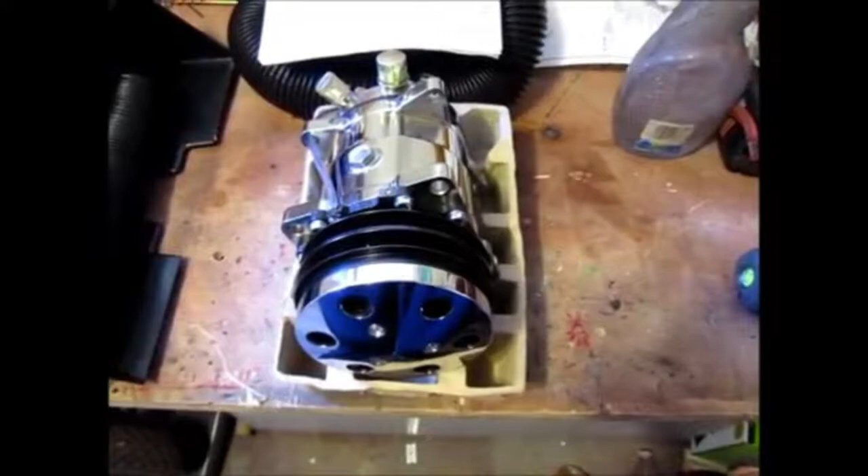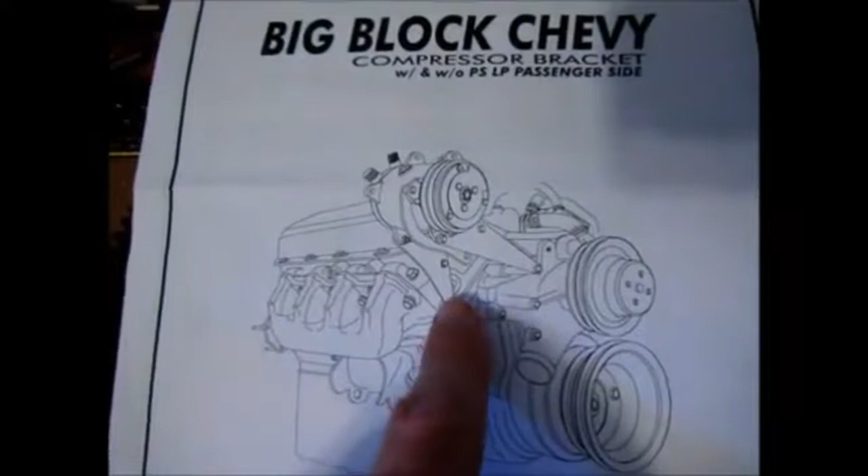The next thing I had to work on was getting this compressor motor on the passenger side. And as with everything else on this project, it wasn't just a wham bam easy installation—things had to be modified. So the first thing I did was get a bracket that would put it on the passenger side.

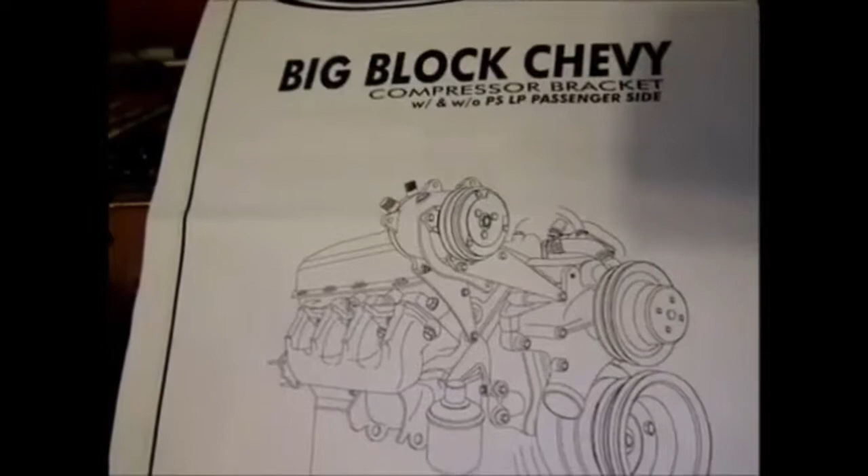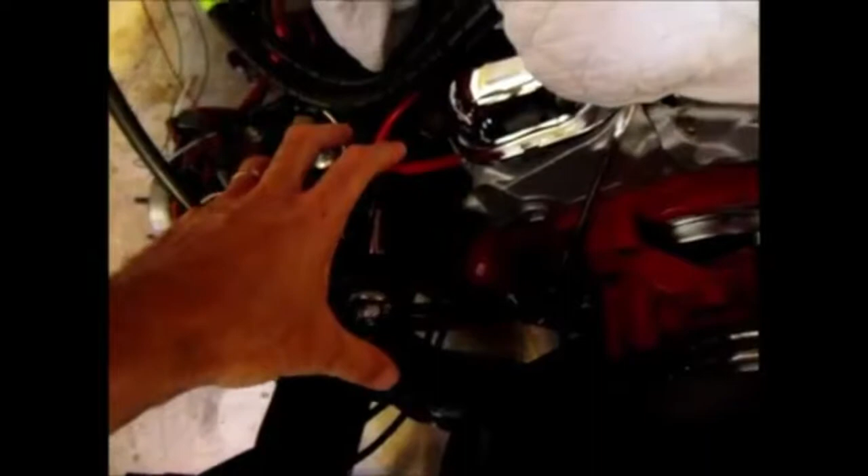There were two choices: one offered from Vintage Air, or the Alan Grove unit, but basically they're both the same. They put the compressor off to the side, and when it gets pushed over, the compressor gets pushed all the way to this side. Now you know why the battery was in the way—because the compressor bracketry would bring it all the way over there. That's why the battery had to go into the trunk.

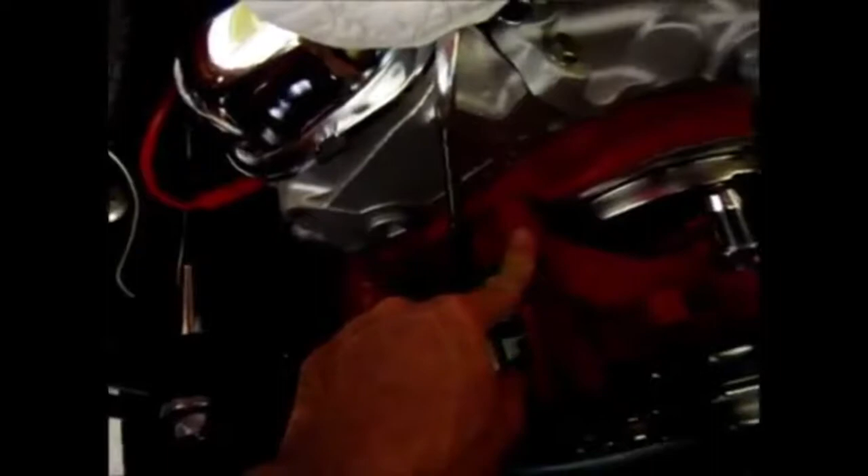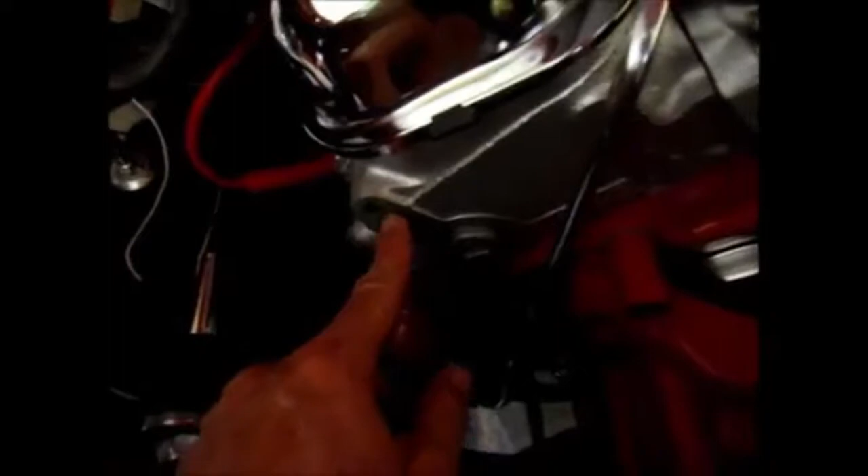Now, because I had the alternator on the bottom, that created a bit of a challenge, because the bracketry uses the two bolts on the head as well as the water pump bolt, and the alternator bracketry also uses a bolt on the head, but it uses this bolt. So I had to figure out a way to get both the alternator bracket and the new compressor motor bracket to join, so I wouldn't have a problem installing both units on this side.

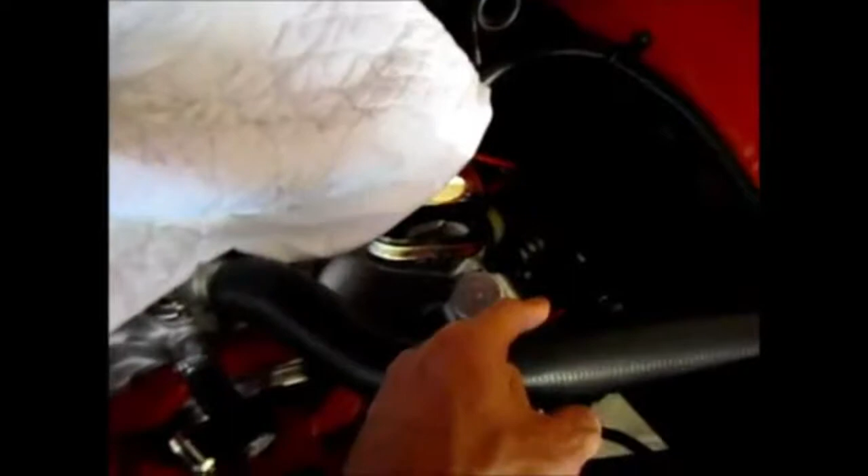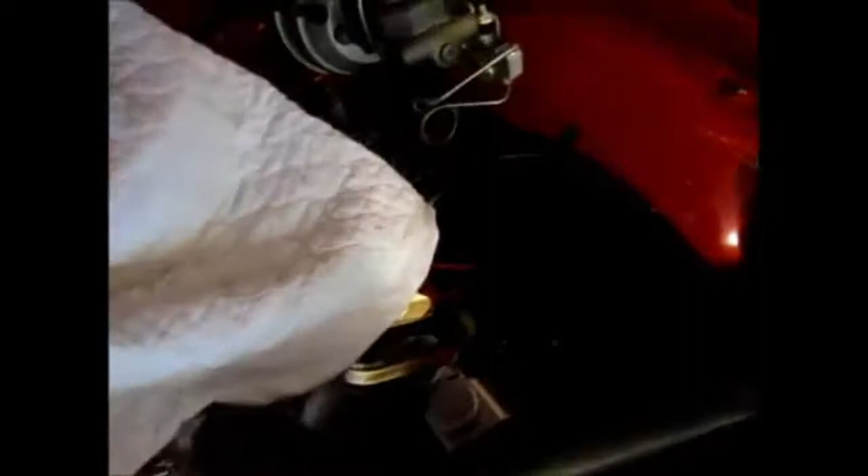Normally, if you want the compressor on this side, you have to put the alternator on the other side with a similar bracket that looks exactly like the one for the compressor, but it's for the alternator instead. As I stated earlier, I have too much stuff on this side and didn't want the alternator there—I wanted it here, under the compressor. So I had to do some work to get that done.

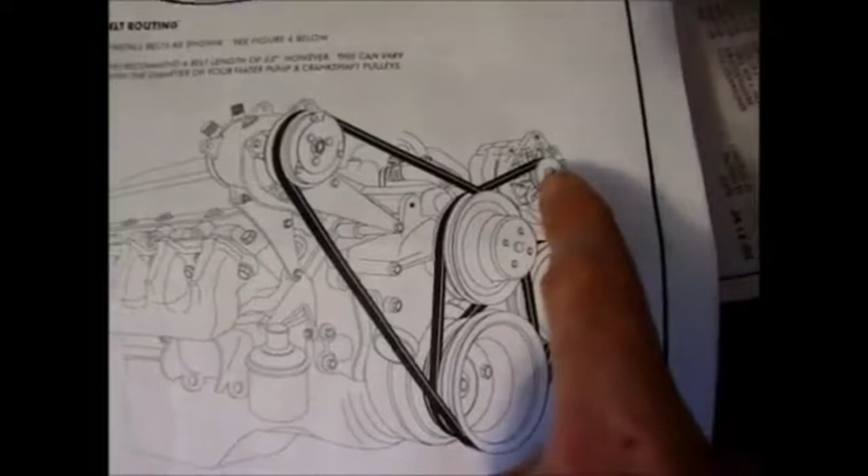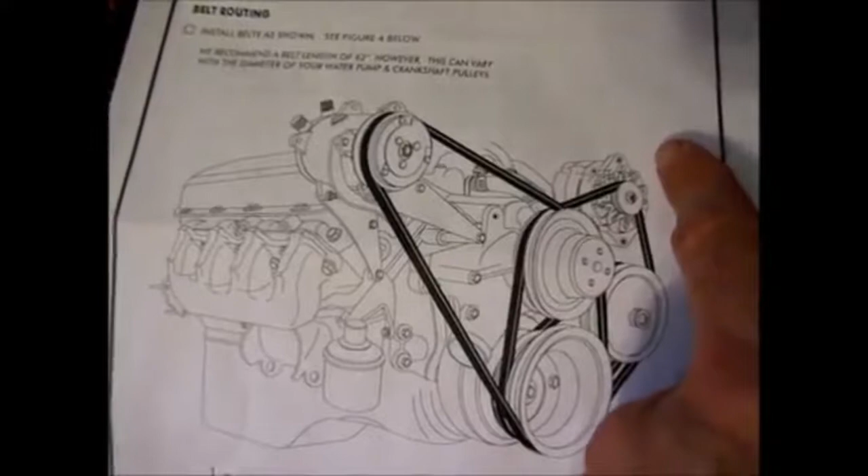Here's basically what the setup is supposed to look like: the compressor on this side and the alternator on the other side. There are two ways to mount the alternator on this side. You could use something similar to stock, which mounts it close to the block, or get the Steeleze bracketry from Vintage Air or the Alan Grove bracketry, which is the same—it would be exactly like the compressor bracket, but put the alternator up here so it'll be in line with each other.

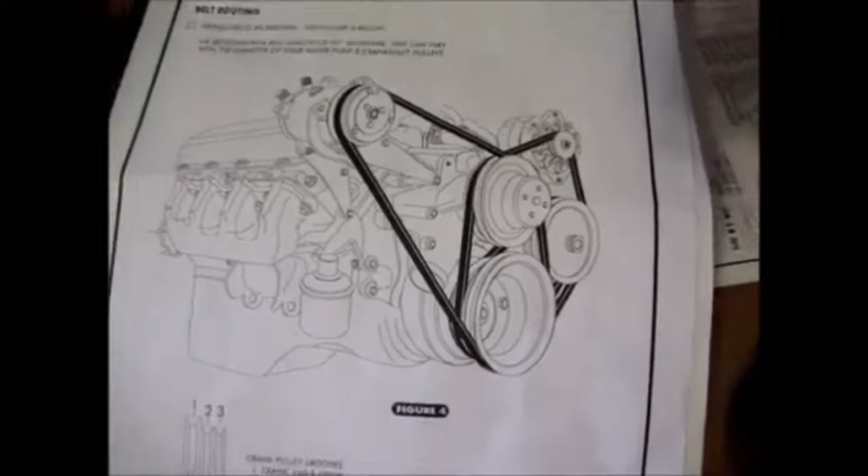Now why is this important? Why am I showing you this? The reason is the way the belts route. When you have the compressor on this side, the belt is supposed to route to the crankshaft and the water pump, then over to the compressor again. The way I had it before, since the alternator was down here, it was routed similarly to how it is now, but it would go around the crankshaft, the water pump, and back to the alternator.

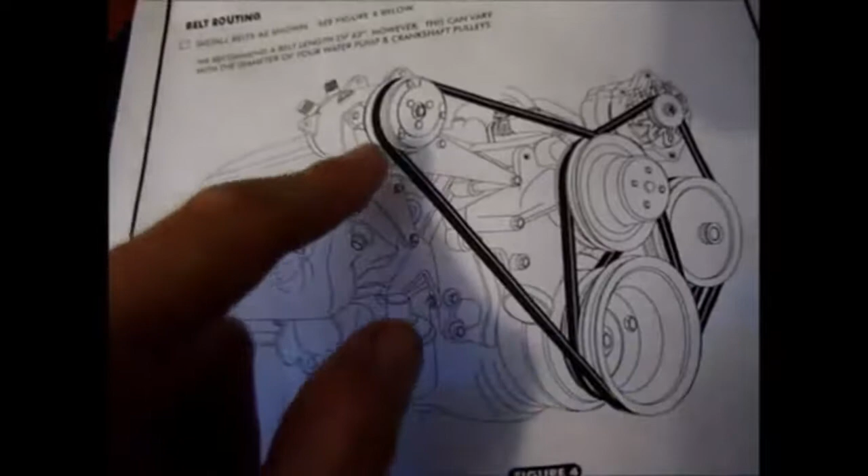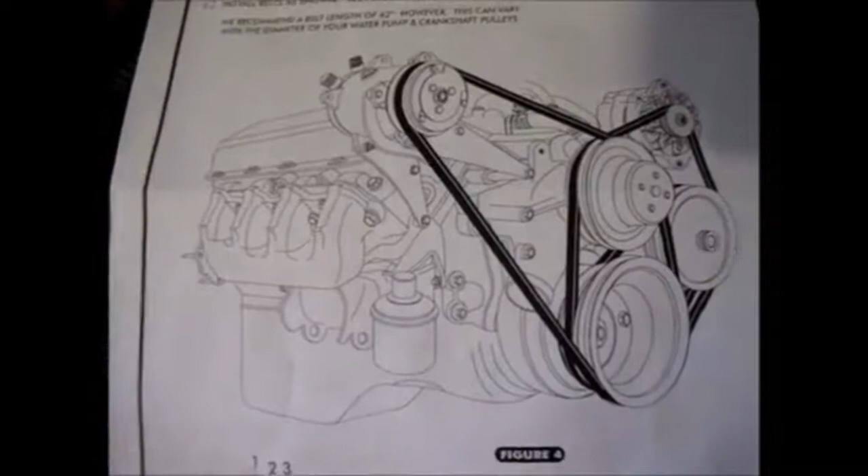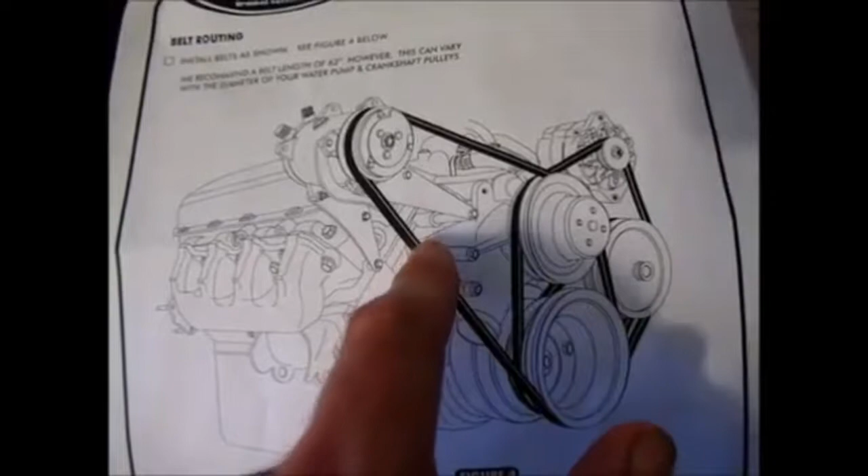When you install this bracketry onto this side of the engine, this belt goes in line with the alternator, and that creates a problem, because there's no way you can route the belt all the way around the compressor, water pump, and crankshaft and at the same time put tension on the alternator. It just won't happen.

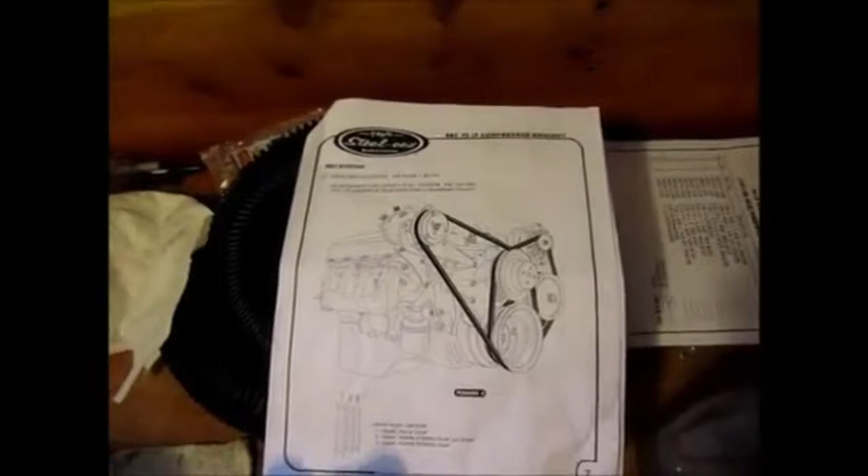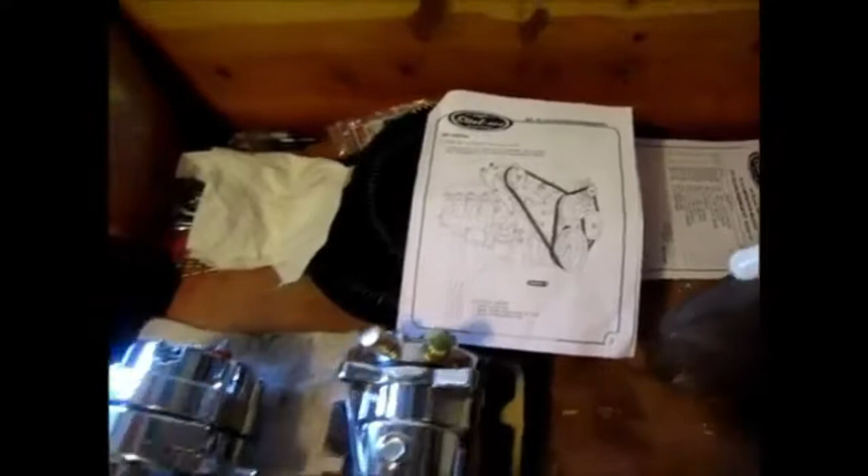So I had to figure out how to do it, and it took me all day, with a lot of trial and error and modification. Well, I got it, and I'll show you the end result. I'm not going to show you the actual process I took to make it, but I'll try to explain it the best I can.

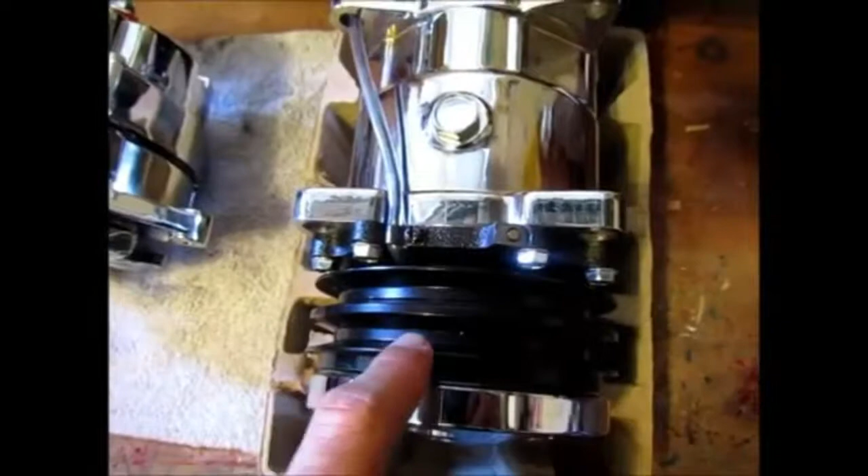Basically, this is the pulley that will be used to route for these two. Okay, so this is right here. After doing the initial routing, I noticed I have another pulley. This compressor—lucky me—I can use or utilize this pulley to operate my alternator.

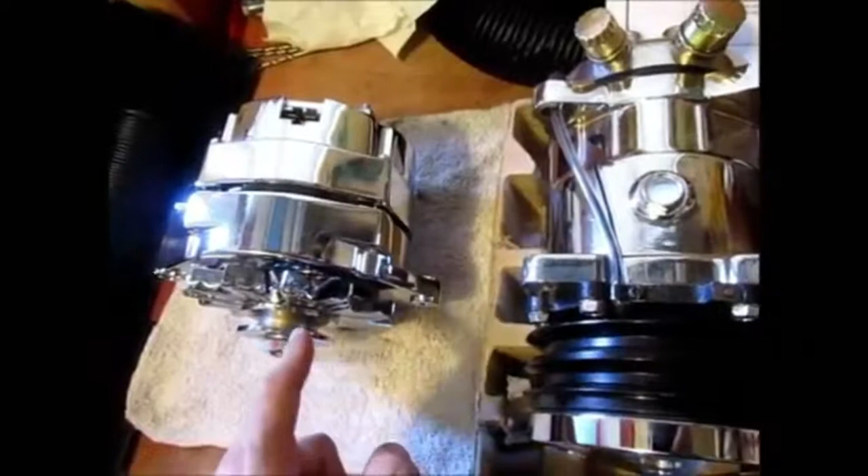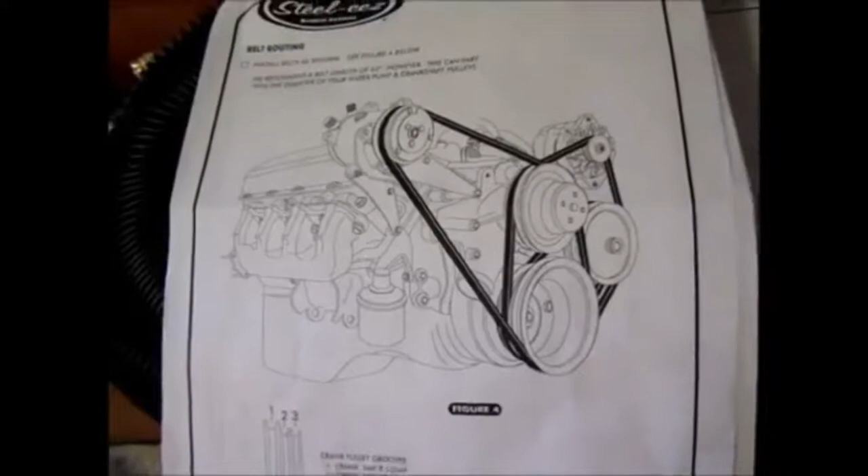So basically, the way it was set up when I first put it all together, this was in line with the alternator. So the solution is to move the alternator back so it utilizes this pulley—the belt would only go from the compressor to the alternator, but the pulley for the compressor will be powered by the crankshaft and the water pump. That's what I wanted to do, and that's the solution I had to come up with.

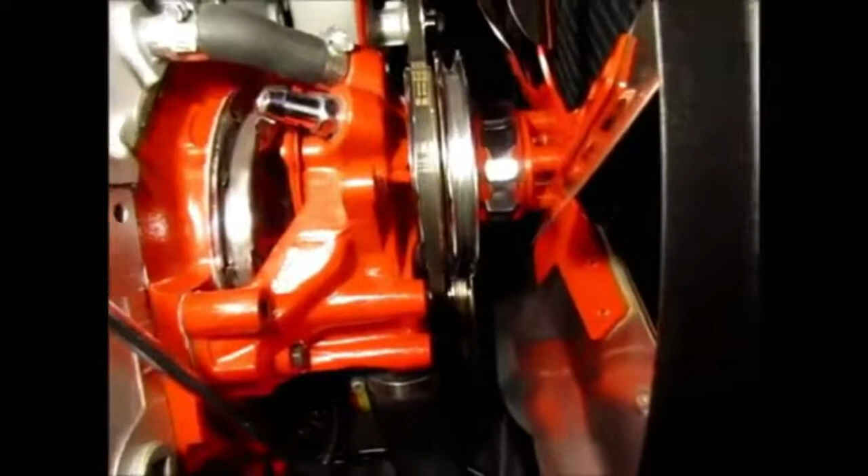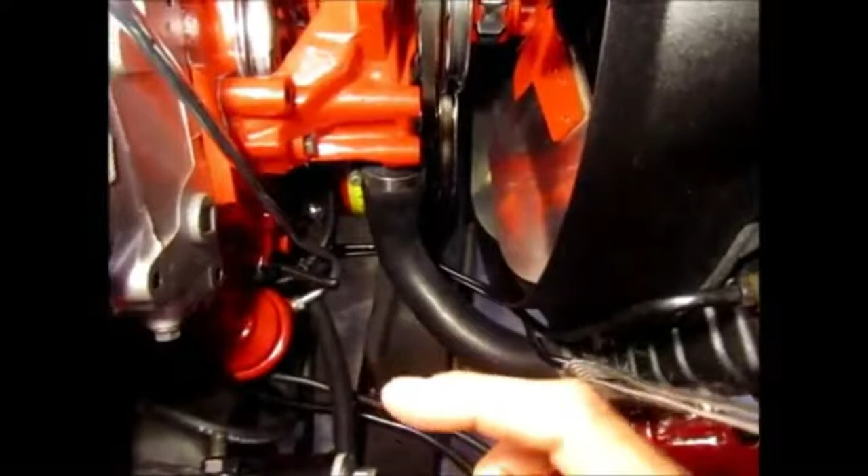Looking at my pulley system, you'll see that this is the one I'm going to be using, which was previously used for the alternator, but will now be used for the compressor motor. I can't use that other one because of the bracketry and the way it's set up, plus that one's being taken up by the power steering pump. So I needed to have the belt isolated, and with the way I calculated and played around with the bracketry and modifying it, I'm able to get the power I need to power the alternator through the compressor.

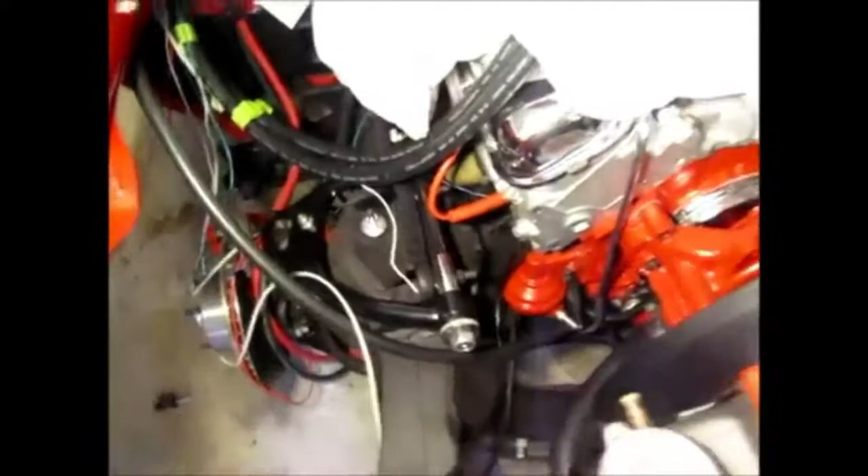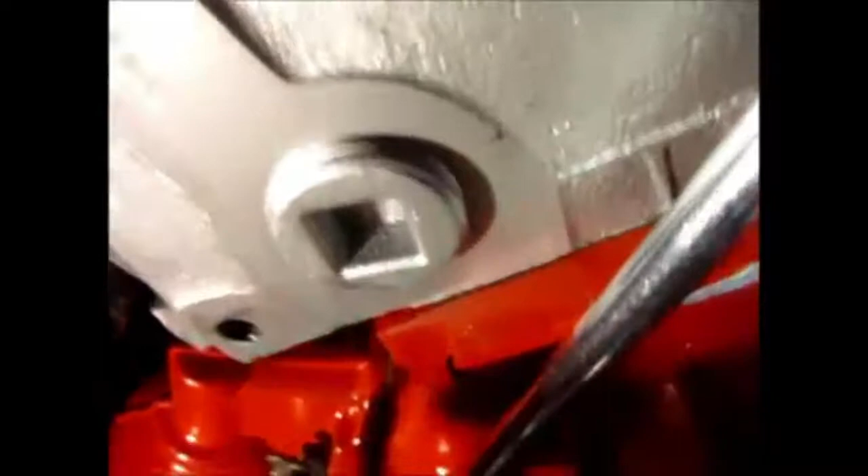Now, because I already did all the modifications, I'm going to show you the things that I did in order to make this work. The first thing I had to do was right here on the engine block, you'll notice I had to notch the actual engine block to get this to work. This notch clears the alternator's new position, and that's the first modification.

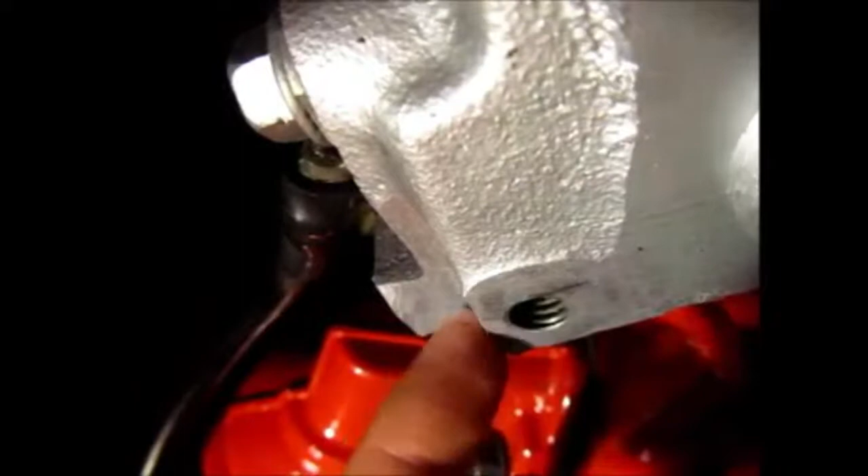The second modification was I had to make another cut, but on the actual head of the engine. Basically these notches are just to clear certain parts of the alternator, because now the alternator is a lot closer to the engine block. So those are the first two - I made a notch over here and a notch over here.

So now I'm going to install the bracket and show you another modification I had to do in order to get this alternator close to the engine block. Now here's the first bracket attached to the engine.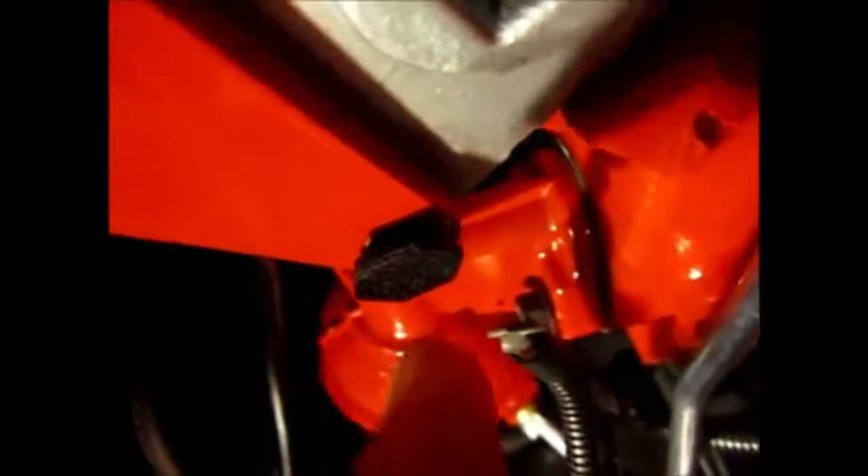The second modification that had to be done was this bolt here - I had to shave down the head, so you see how thin it is. Now I didn't have to shave it down that thin, but I did have to shave it down. So that head is just basically support for this bracketry.

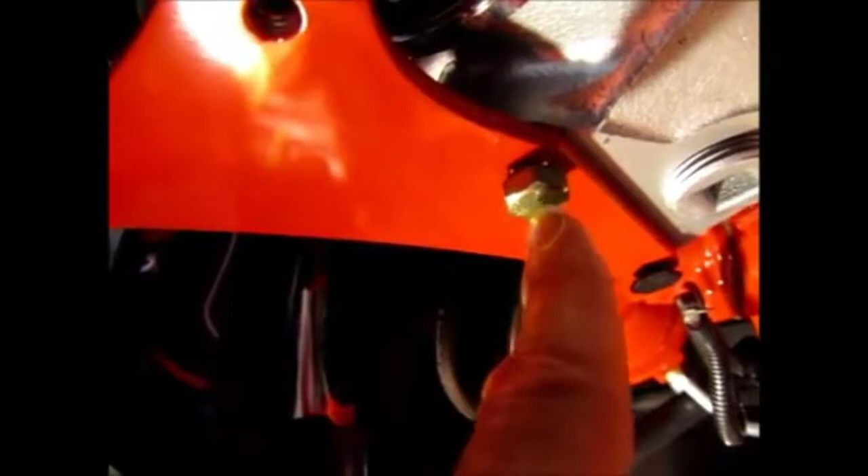The majority of the support will come from this screw - obviously this is not the screw that's going to be used. This screw is going to be replaced with a 5-inch long screw that will be holding the actual alternator in place, and that force will be applied all the way through the alternator and through these spacers, and it will be attached to the block.

This one is just there to basically hold it in place. Now I will put it tight, but I'm going to put some Loctite on the screw so that it doesn't come off. I cannot put a lock washer because the whole point in cutting this head down was to make clearance for the alternator's new position, which is in three-quarters of an inch more, so that it can reach the other pulley on the compressor.

Now with the bracket installed, you can see why I had to make that notch - so it's actually in line with the bracketry. And in the other one, the other notch is right there. I'll show you why I had to make those notches.

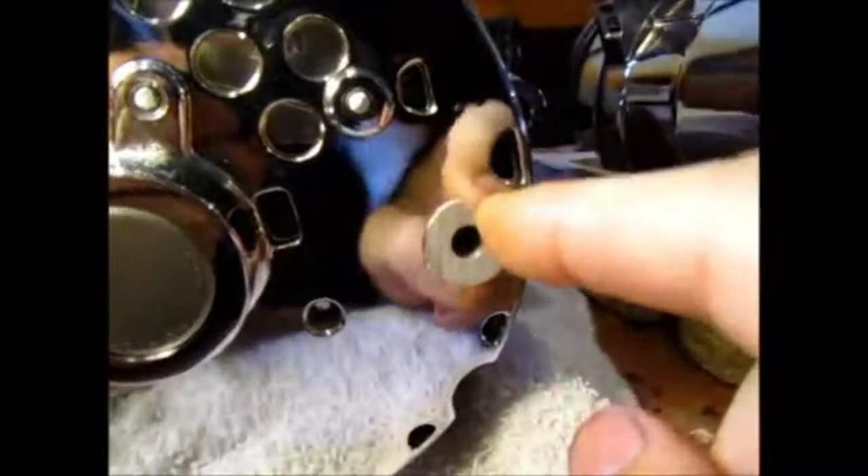Now the alternator also had to be modified - basically just one little modification. There's a little part here that was sticking out. I guess it's supposed to be another one of these, but there was nothing there, it was just empty. So this cutout here, I had to actually cut off.

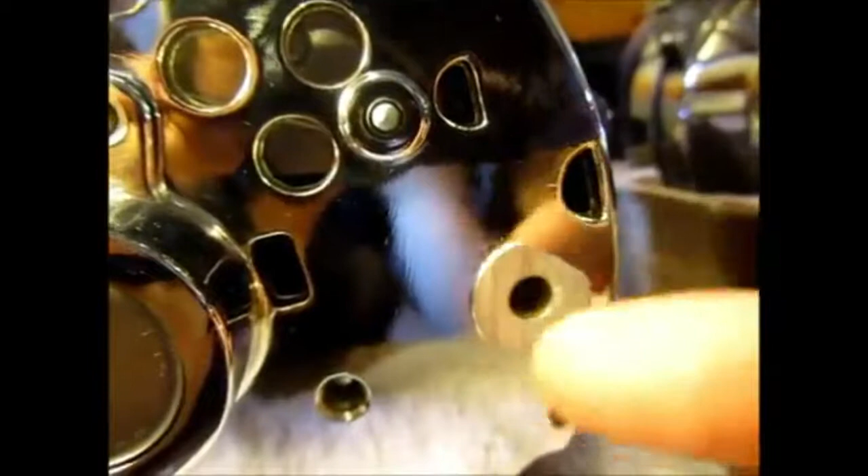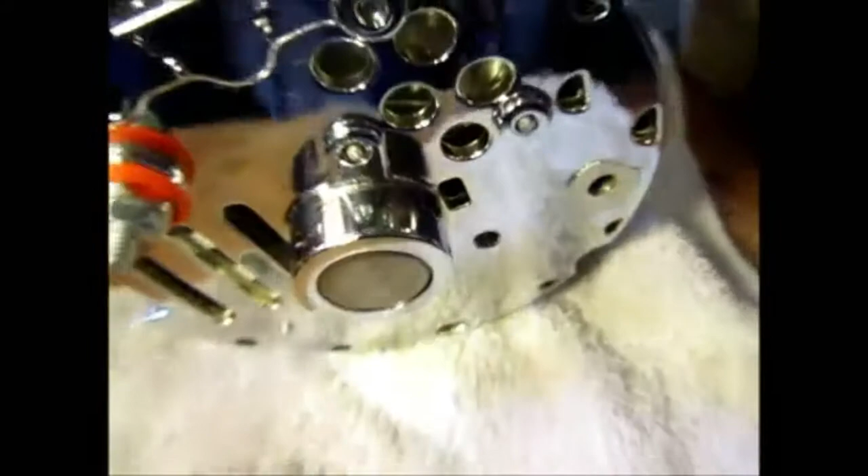You can see it's completely cut off. I cut that off and made way for the portion of the block, so this clears that portion of the block. The one on the head, the cutout I made for the head, is to clear this - basically this round portion of the alternator. So with those cutouts on the block, I'd be able to fit the alternator so that it clears both areas. That's why those cutouts were made.

Those were one of the modifications I had to figure out with the constant - I must have put this alternator in and taken it out maybe about 25 times with the amount of modification cuts I had to make. I would cut little by little and then put the alternator back and then take it off, and it was just a hassle. So those are one of the first modifications. Now we move over to this modification.

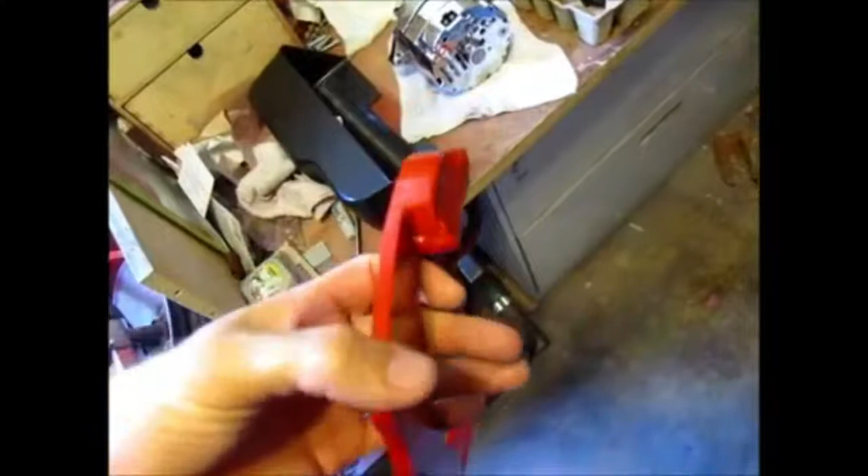This was the major headache from the mod, and I will have to show you another bracket that I had to modify just because I had to modify this one. As you can see from the little lines, I had to install a couple plates, basically 3/4 inch plates, in order to make up the difference of the 3/4 I needed to put this alternator in line where I need it.

The bracket is supposed to be right here in line with the first plate. But what I did was cut it off completely and install another bracket, which was actually the original bracket from the alternator on the Nova, and I welded it on. Then, of course, made my cuts. You can see my nice handiwork there.

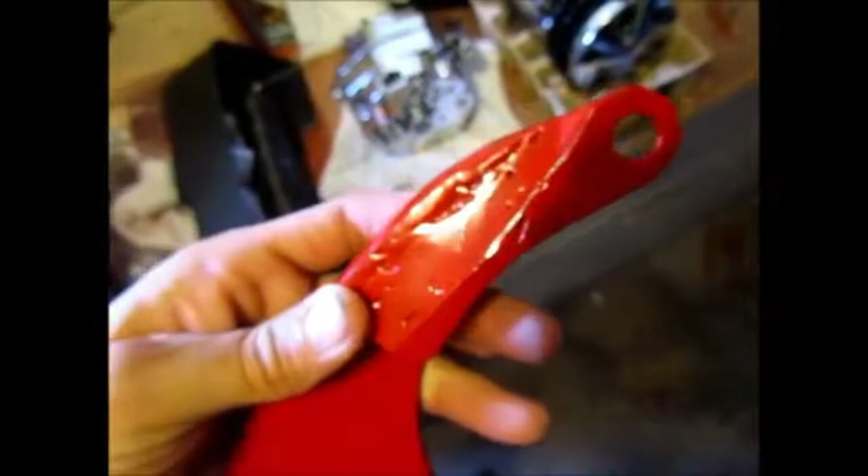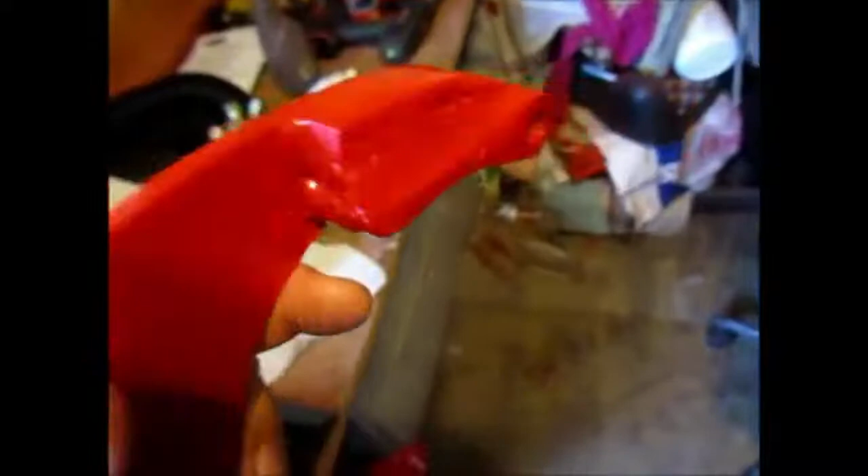And did a full entire weld. Basically everything you see on the bottom and the front here is all basically weld. I just grinded it down so that way I get this shape. I'll put it on the car so you can see what it was basically intended.

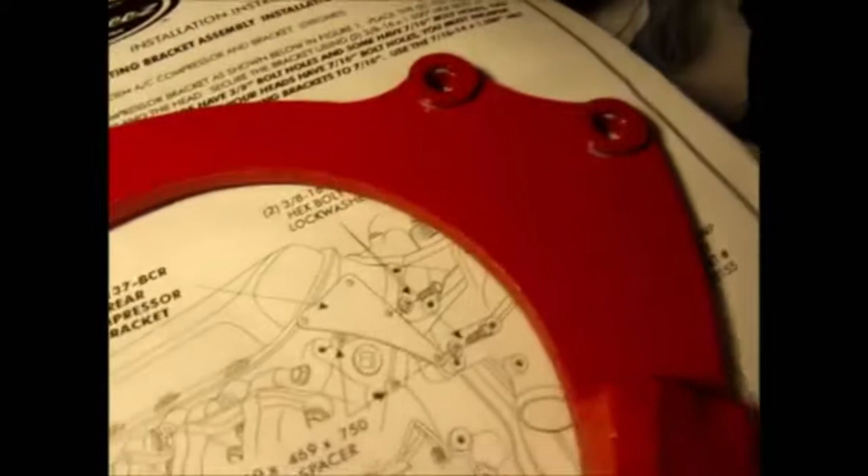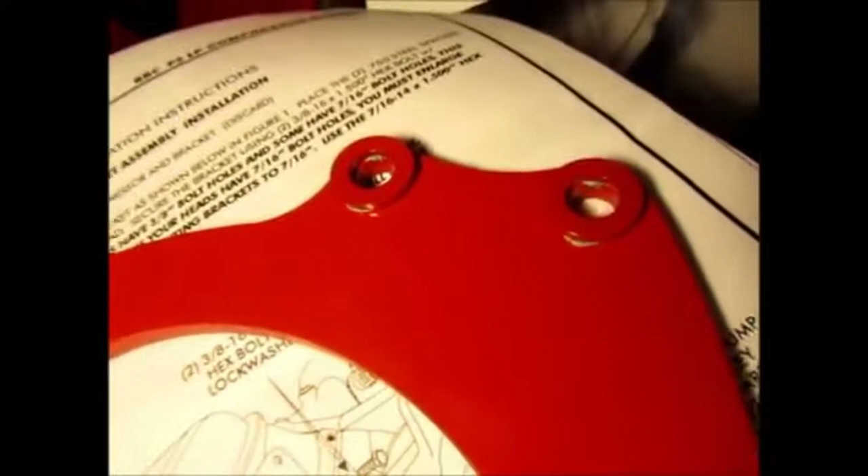Now, in order to get this bracket perfectly aligned with what I was trying to do, I needed to also install two washers, basically about 1/16 of an inch thick. It was necessary to install the washers to get the alignment needed for this bracketry, and of course my modification. So you can imagine how much trial and error I had to do to get the bracket to fit and make it so it's in line with the compressor.

So here is the bracket installed, and you can see how it's supposed to be. This is supposed to be in line with that one, but now it's moved over closer towards the engine block.

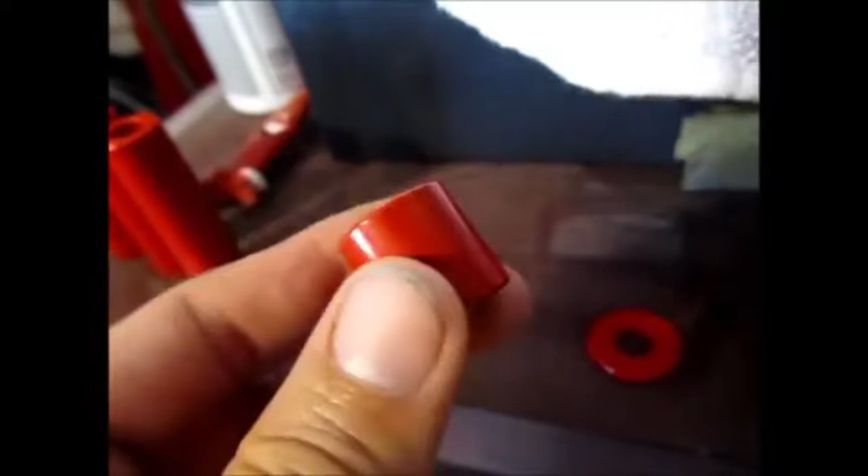Now whatever I do to the top, I need to do to the bottom, and in order for me to do that, I needed to use a spacer. Here are the spacers, and basically just a 3/4 inch spacer is what I needed to get the clearance I needed.

Now all these spacers except for one of them came with the kit. This one right here did not. This one came with the alternator kit, the original spacer, and what I had to do was just cut it down to 2.5 inches so I can get the spacer needed for the new alternator position.

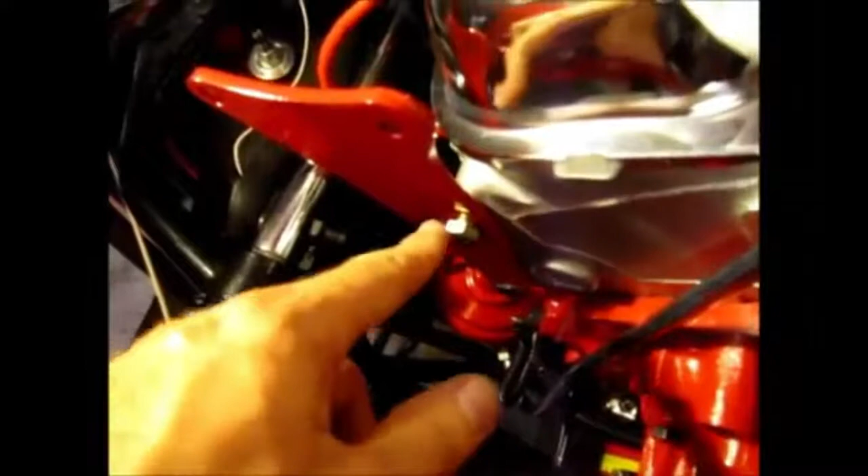And the reason why I had to cut it down to 2.5 is because now I have a bracket in the place. Basically the spacer was to go from the alternator, here would be the alternator, and then the spacer all the way to the block. But because of the modification, because I'm adding a bracket, I needed to cut the spacer down.

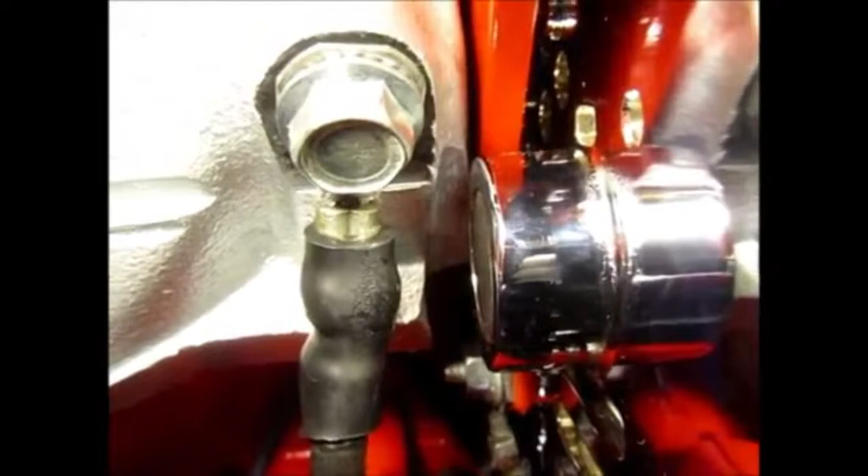So now I installed the alternator, and I'm going to show you why I made those cuts. Here you can see the cut for the engine block on the head. That's the cut I made for the head, and that was to bypass this portion of the alternator, as you can see, and also to make sure that the positive battery cable is nowhere near the engine block, because if they both touched, that would be very bad.

So I got the clearance I needed for that, and I'll show you the other one. The other clearance that I made was for the engine block, and you can see there, and that was to make sure that the alternator body does not touch the engine block.

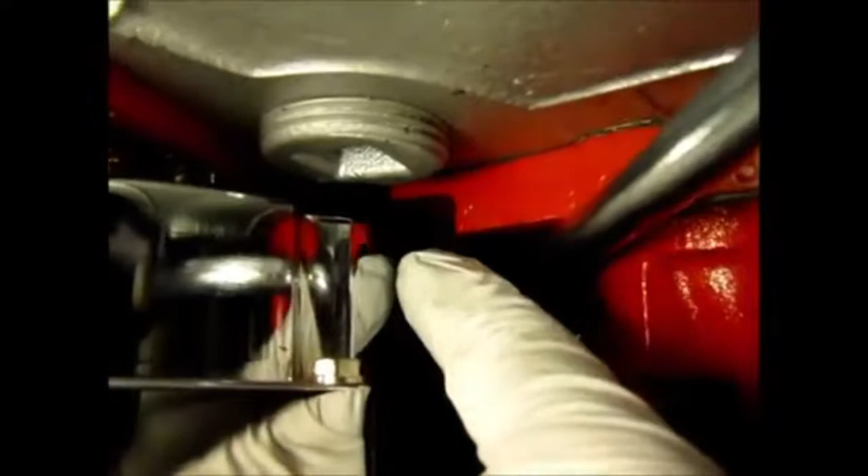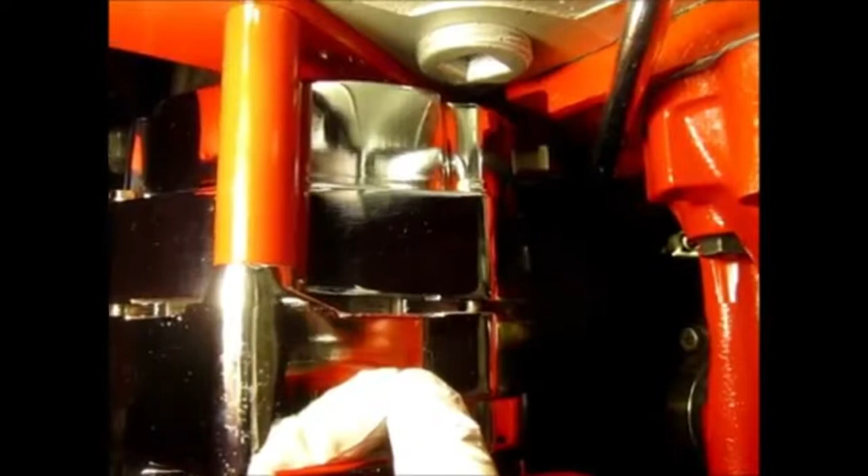Now you notice I cut a lot. Originally when I was making these modifications and doing the test fittings, I had thought I would have to adjust the alternator body to get the tension on the belt. But after mocking up the compressor motor, I realized that the alternator body has to remain stationary in order for me to put tension on the belt.

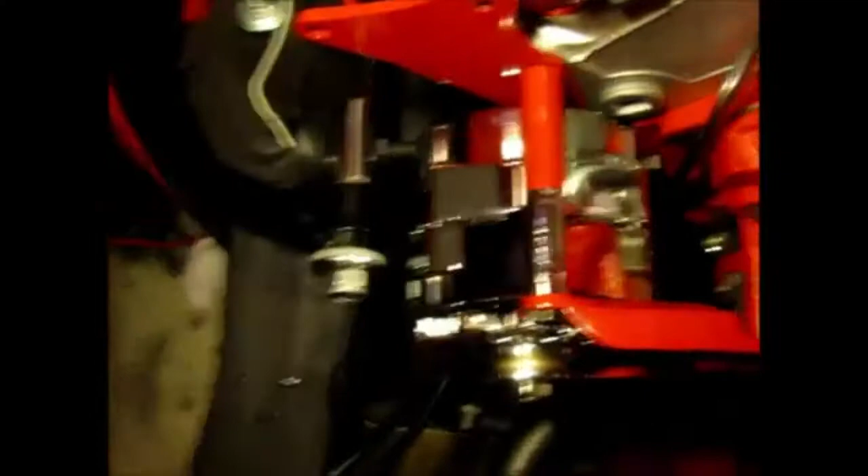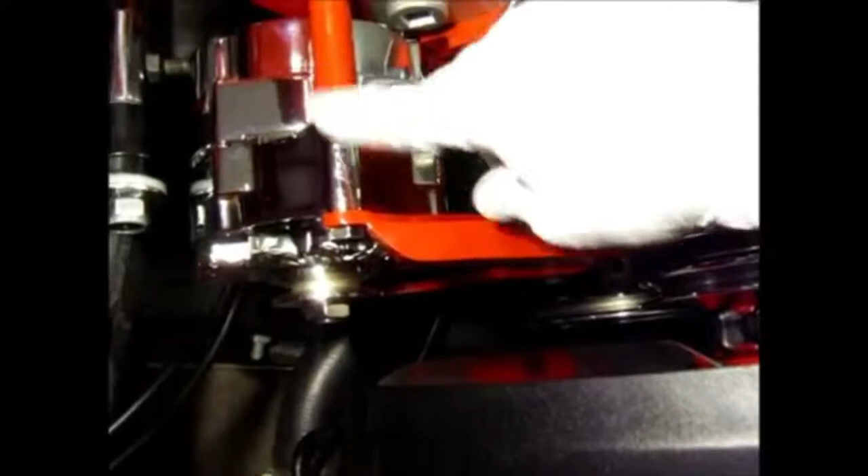Why? That is because the tension for the alternator and the water pump belt has to be applied at the same time. So if I make the alternator completely stationary, that would allow me to put tension on both belts at the same time. So when I get my measurements for the belts, I will put the bracketry in such a way so that I can get an inch or 1.5 inches of tension, and then take measurements for the belts I need, and then pick from the belts that are available for the measurements that I get.

So now the bottom of the alternator, you can see the bracket there. I have the alternator and a screw that was long enough. I wanted to make sure it protrudes because I'm going to lock down the alternator from both sides, so I have tension on this side.

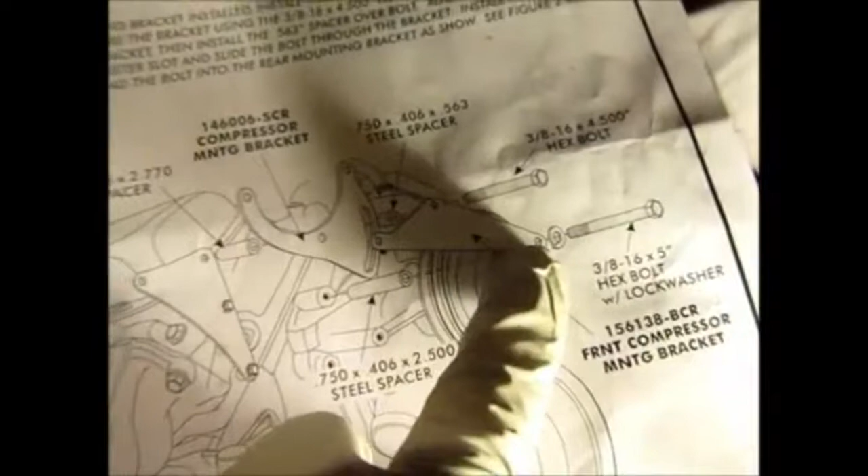I'm going to put a screw on the other side so that the tension is never lost and my alternator remains completely stationary. Now I install the other bracketry, along with the adjustment bracket for the compressor motor. This bracket was the other one I had to modify because of modifications made to the one under it.

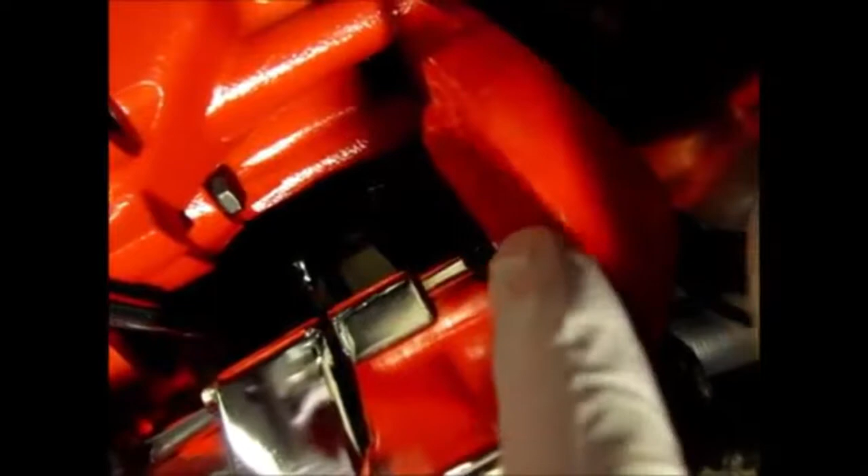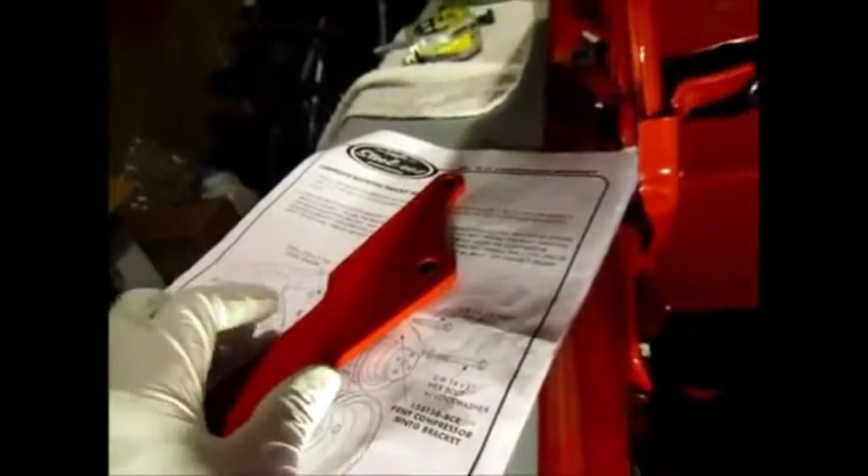Because they run so close, this bracket is supposed to be straight across, but I have a long notch in it so it bypasses that. You'll notice the notch curves outward, which also provides clearance. I didn't want to cut this down too much, nor cut too much off the other, so I cut a little off both so they clear each other. I'm going to install it now and show you the clearance.

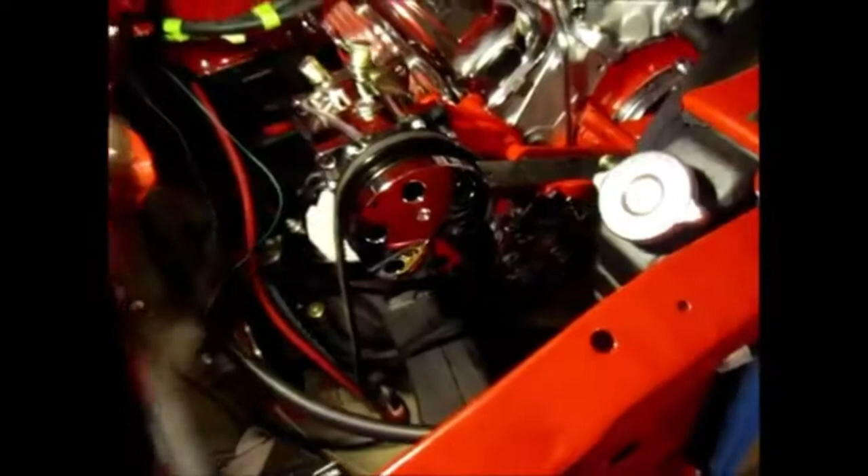Well, here it is. There's the compressor installed with all the bracketry. Before I get into the brackets, let me show you how the belts are positioned. I have a pipe wrench putting tension on the belt so I can show you it running across the two pulleys. This is the old belt that was on previously, and you can see how nice and straight that is.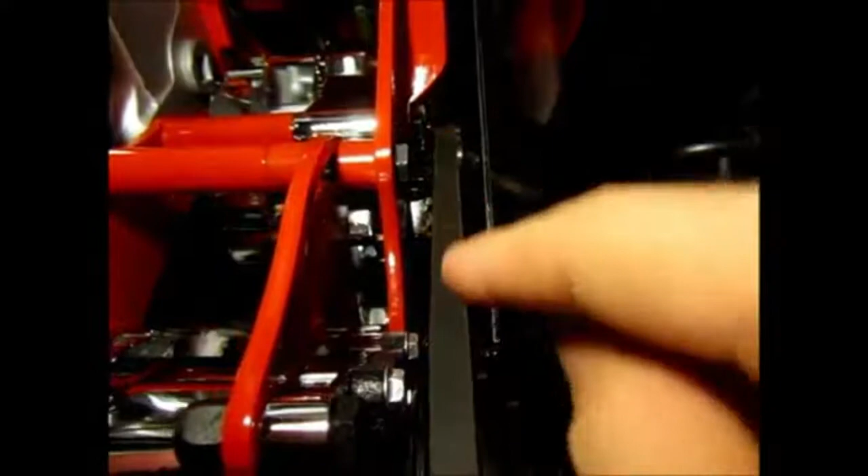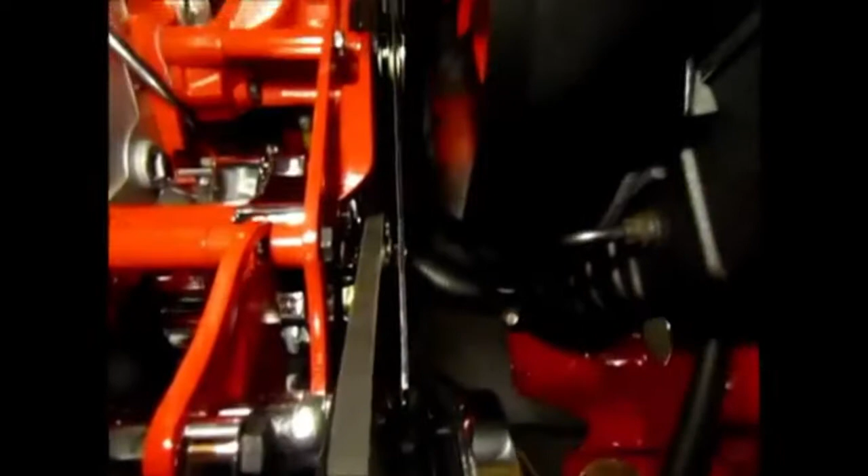There's the alternator pulley, and here is the second bank for the compressor pulley. This ruler simulates the pulley running from the crankshaft to the water pump to the compressor, and you can see how parallel and straight that is. So now the alternator gets its power from the compressor, and the compressor with the alternator together gets its power from the crankshaft and water pump. The other belt still goes to the power steering pump, so that remains unchanged.

But now you can see, let me remove this. Let me remove the other belt as well so I can show you what I did. Here's all the bracketry. Now let's see if I can get the camera to show the clearance I was talking about.

That's what I wanted when I made that notch. For the clearance on the side, you can see right there, and if I put the light in the back, you can see light being shined from under, running on the bottom. So there's clearance all the way around for that bracket against the alternator bracket. That's why I had to make those modifications.

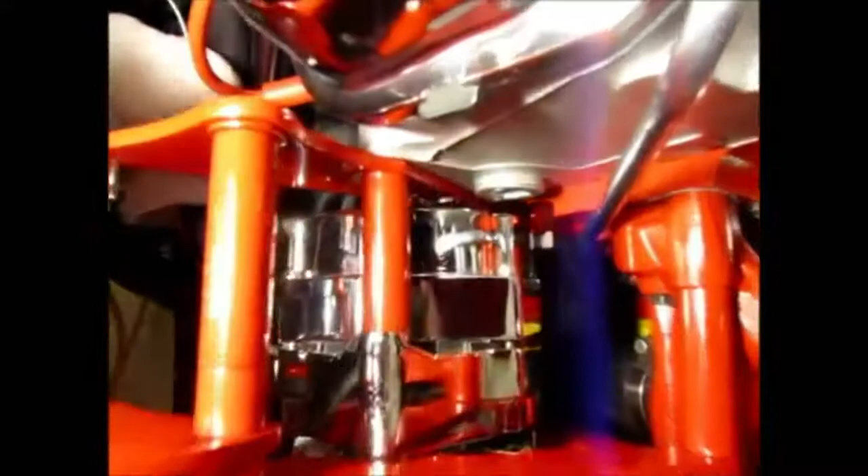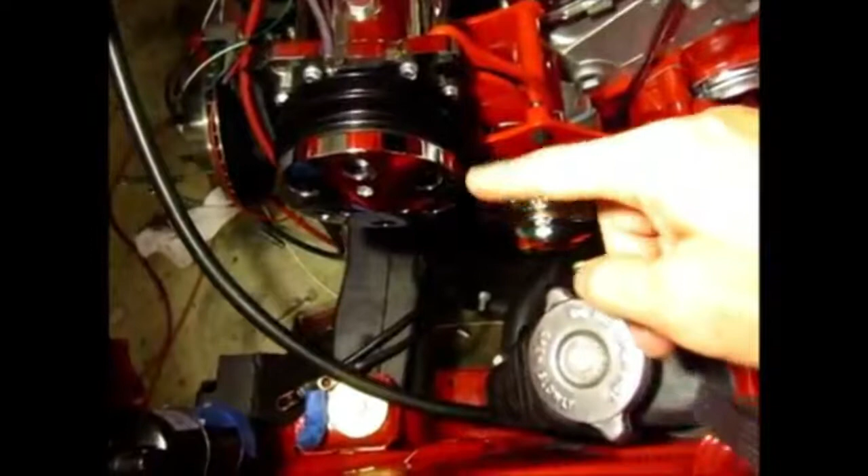I'm very happy with the results, and you can see now where the compressor pulley section is in relation to where the battery was originally. That's why I needed to remove the battery and put it in the trunk - it was definitely a necessity. But the cool thing is I can see all the chrome, the compressor, and the alternator in between all that red. That just looks awesome. I'm very happy with the results. It's coming together really nice.

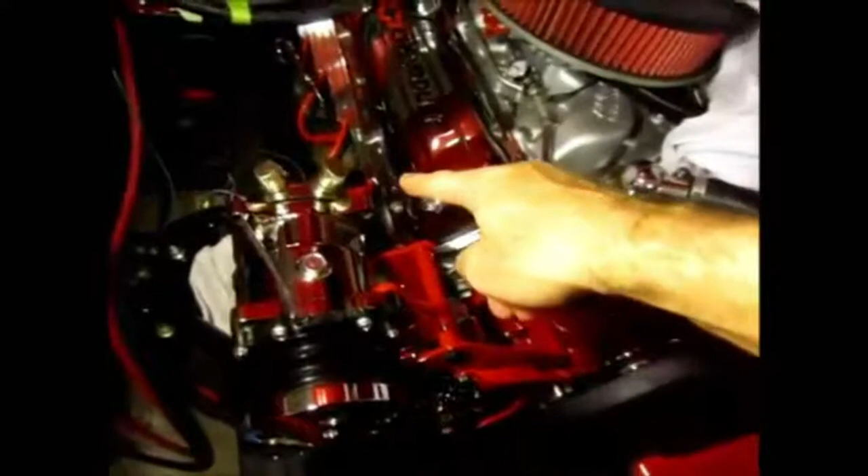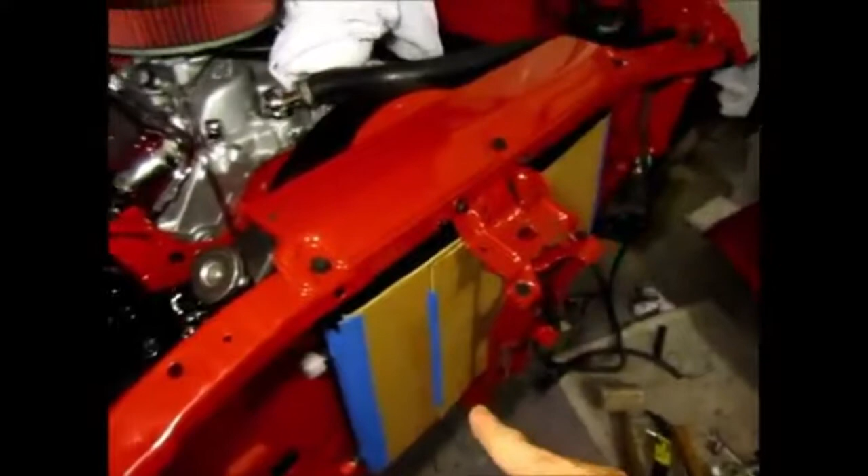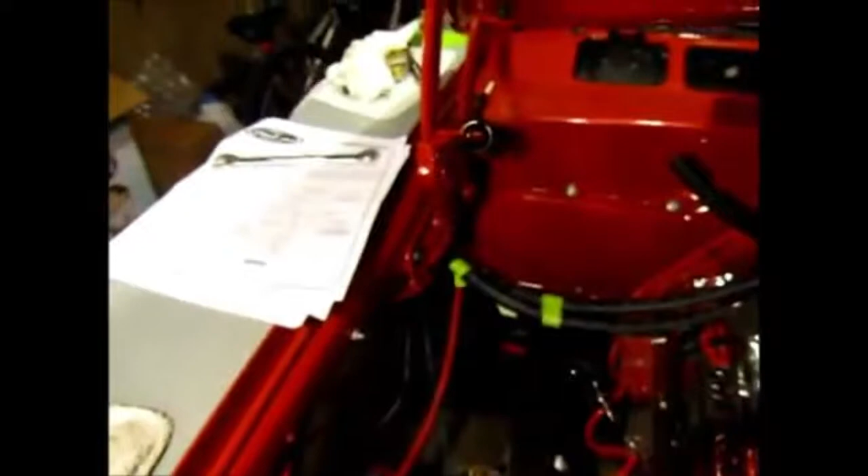So now I can concentrate on routing my lines to where they need to go - the two AC compressor lines. One will come through the fender to the condenser, and the other will go through the firewall down to inside the car. So there it is.